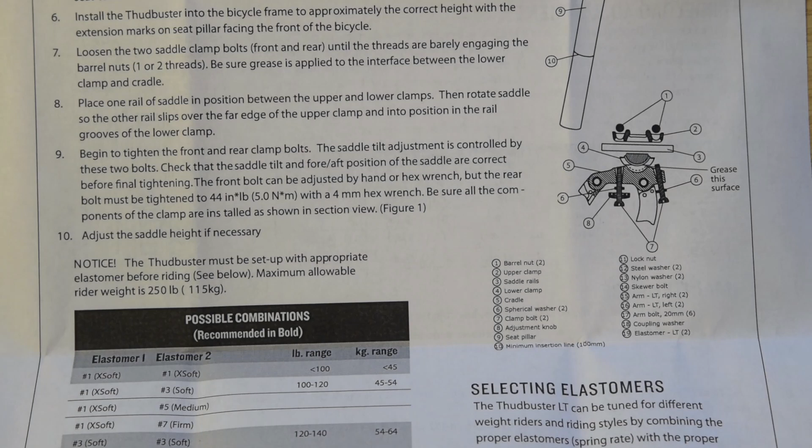It's probably wise to read through the initial installation instructions, so here's what it looks like. If you want to pause and read through it, you can. Here's the lower part, and I'll move it down one more time. The chart here could be pretty important, so let me get a closer look at that.

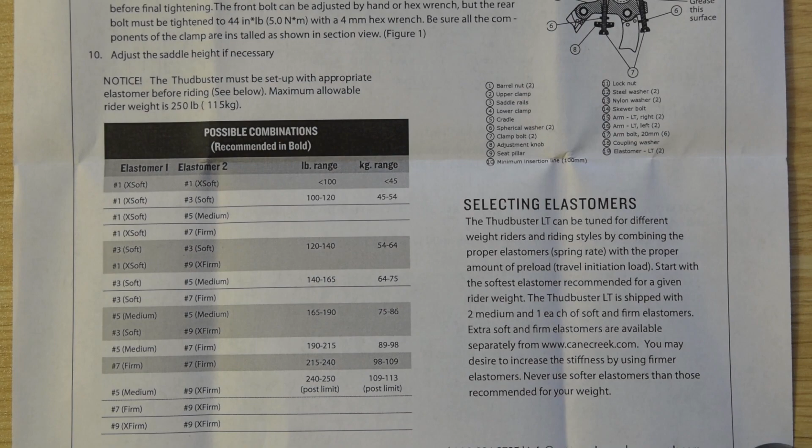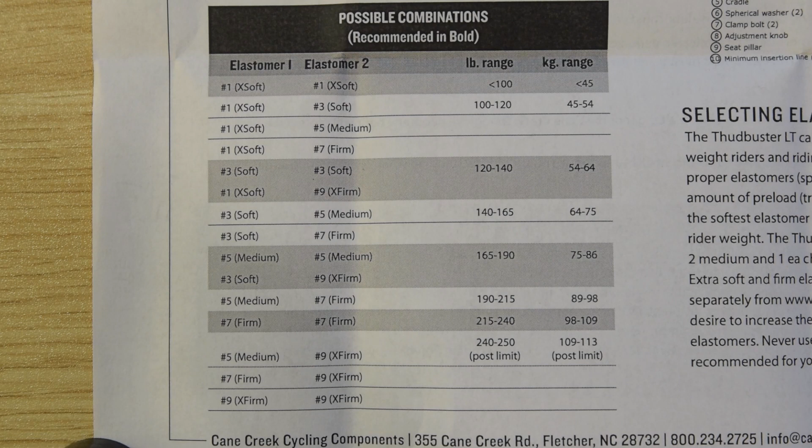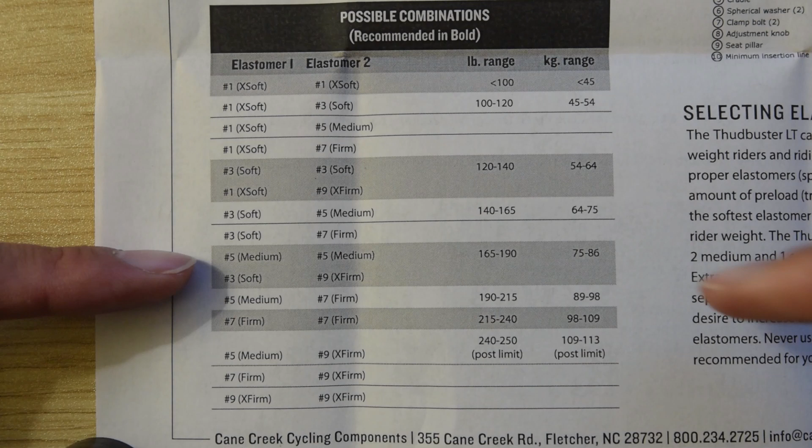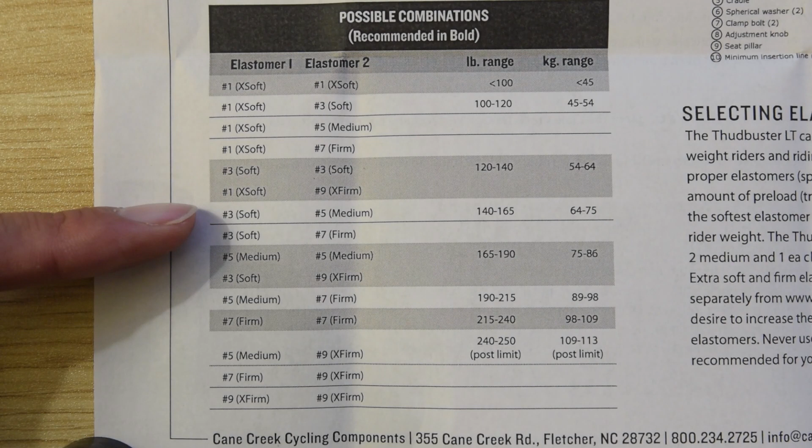So indeed this chart is important, whether you already have one or not. It shows the combinations of elastomers, and what it comes with is two 5s, which is for riders weighing 165 to 190 pounds, or between 75 and 86 kilograms if you're metric. I am a little lighter than that, so I may have to go with a 3 and a 5, because I'm between 140 and 165 pounds, so I'm going to use that.

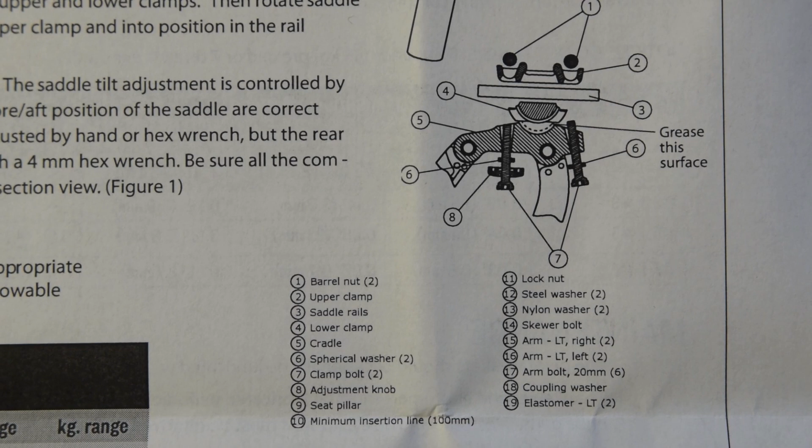There's also another schematic diagram here, so let me get a close-up so you can see how it's put together. As I mentioned earlier, it's supposed to weigh 585 grams.

So what do you think? Does this post weigh more or less than 585 grams? I haven't weighed this yet, but my guess is it'll weigh a little more, because manufacturers sometimes like to say things are lighter than they actually are. So my guess is let's say 590 grams.

Alright, let's see what it is. Oh, hey, it's more than 585. This is weighing at 602 grams as is, and that's with the two number 5 elastomers.

Let me get one more weight in. I'm not sure if these make a difference. Here's the number 7 elastomer — maybe it's more dense than the others. 21 grams. Here's the number 3 — save 2 grams, because this one is less dense than the 7.

So these are the two I weighed: the number 7 at 21 grams and the number 3 at 19 grams. You can't really tell just by looking at it, but if I squeeze it this way, you can see it compacts a little, while with the same force this one barely moves. So it's probably like that when installed — a lot more firm.

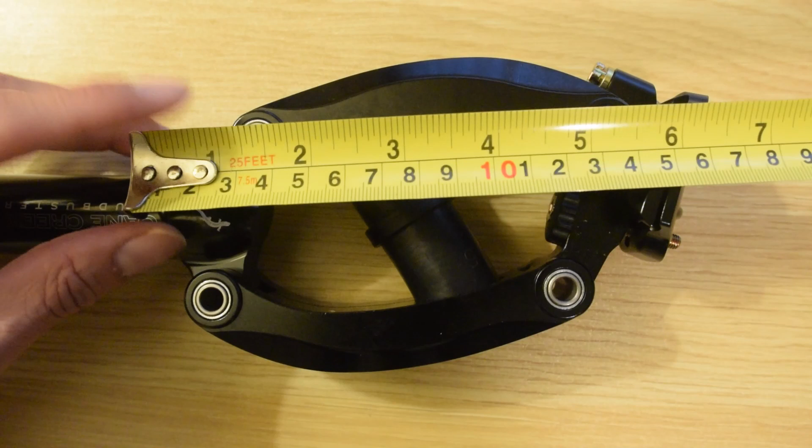You'll see on the left side it's right on the T. I'll hold this there, and when I put it to the middle of the seat post, it looks like it comes closer to 150 millimeters, or 15 centimeters. So make sure you measure — it depends on where in the middle, I guess — but make sure your seat post length has at least, my guess is, 150 millimeters between where the seat post is inserted and the seat rails, or right at the rail. That way you'd know this seat post could work for you.

So this is the back side of the seat post, since the suspension faces downwards toward the rear wheel, and it looks like there's an Allen wrench bolt — looks like a 5 millimeter to me just by eyeing it. Then on top here is another Allen bolt, and this one looks like it could be 4 millimeter, and it says the torque spec is probably 5 Newton meters.

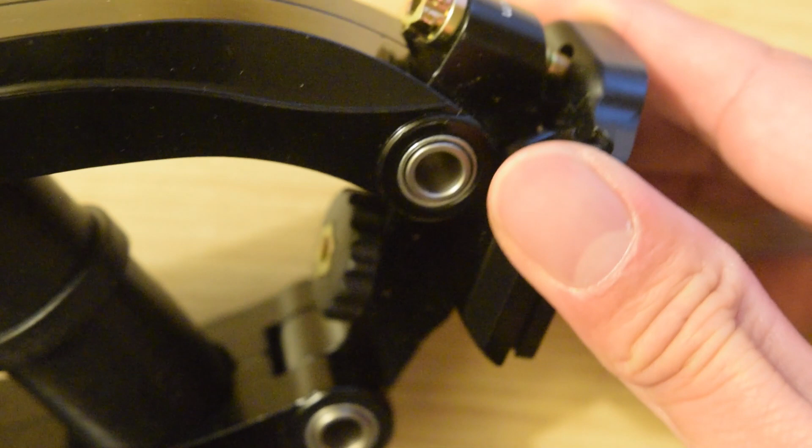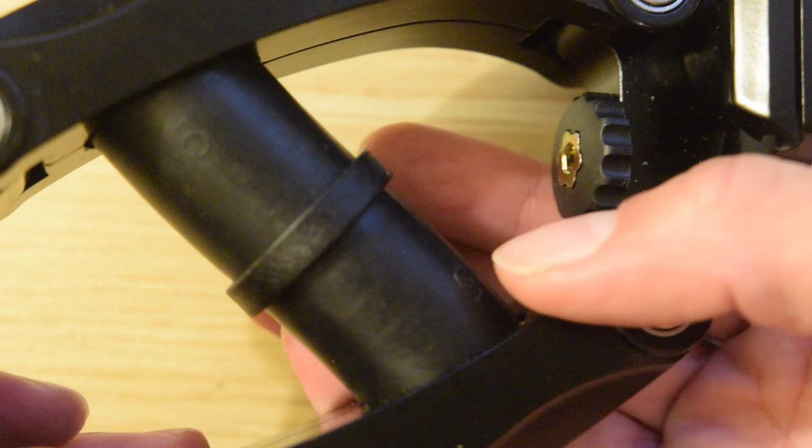And on the inside here is the other part for the seat post, and I don't see a torque spec for that one. This one's actually real tight, so I don't know if I need a wrench. I'm already putting little marks in my hand just trying to move it, so it's real tight. I'm going to have to use a wrench or something to loosen it up a bit, and then we can go look at this side.

This is the upper side, and if I use something flat, even with my hands, you see that it's flush. I could just turn it to show you it's flush. Therefore, you may need a socket to get to this, because if you have a crescent wrench, it'd be a little tough to get in there to loosen that. What other people have said is you'd have to put the seat post in, sit on it a little to compress the elastomers together to loosen it. Then you could go ahead and get towards that.

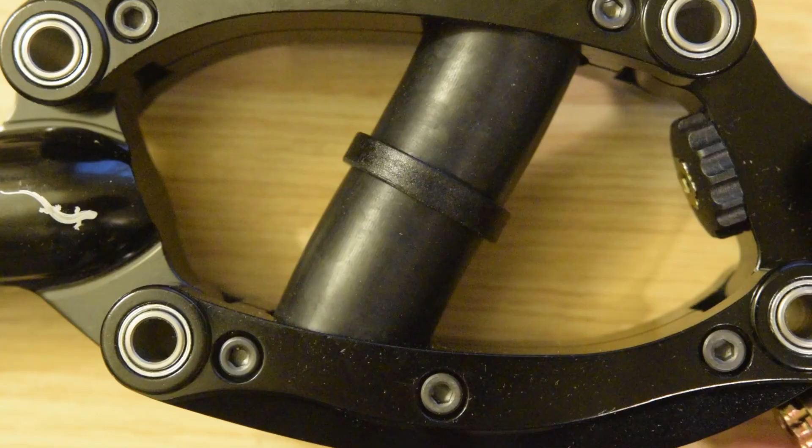So I'm just showing you a close look at this seat post. The front of the seat post is actually upward. This is the front part because the rear faces towards the back. And just looking at the pivots and some Allen bolts. And then I'll go ahead and flip it over, show you the other side, and it looks like those Allen bolts that were here and here on the other side are only on one side, and that would be on the left side. So this is the back because it's lower, and so this is the front, and this would be the left side.

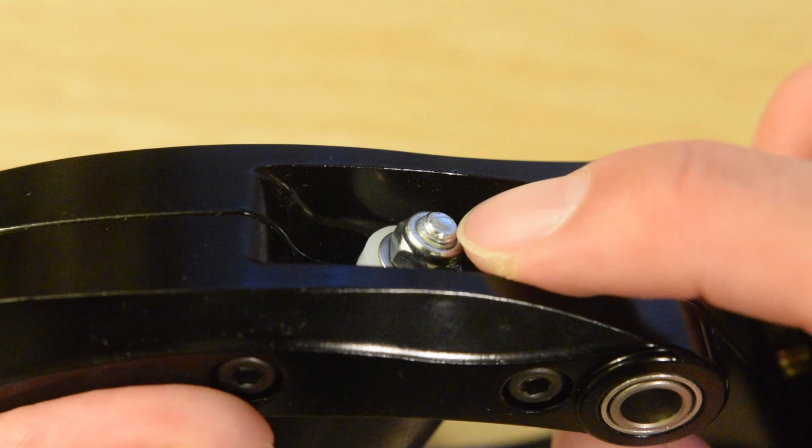Another thing I want to note is this is factory install, and you want to see how many threads there are, so when you do change the shims, or elastomers I mean, you just want to see how many threads there are. So when you tighten it down, it looks like there's about 1.5 to 2 threads showing at the end of this bolt. So that's what you want to note. Then when you install it, and you install it the same, it should be as the factory installed it.

Alright, I tried real hard to loosen this by hand, but it couldn't. So if you look from the top, you'll see that it kind of splits apart a little bit here. And unfortunately, I had to use a tool, so only use it at your own risk, and I already kind of scratched it up a little bit. So what I did is I got these pliers, and I put it here, I gripped them, and then I slowly twisted them in order to loosen it up. And actually, I went this direction to loosen it.

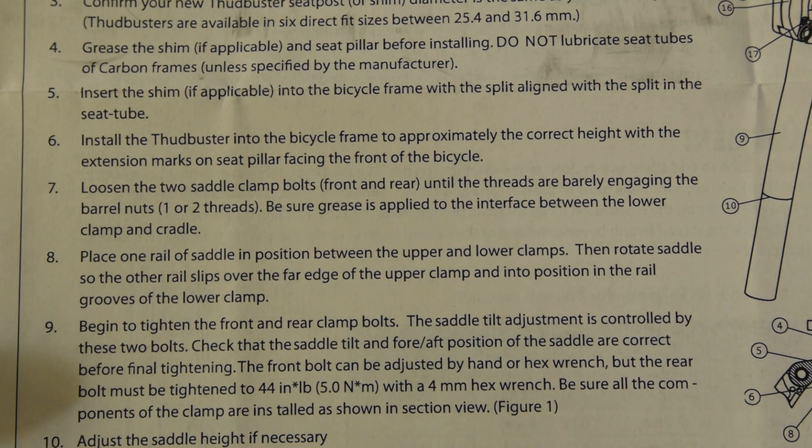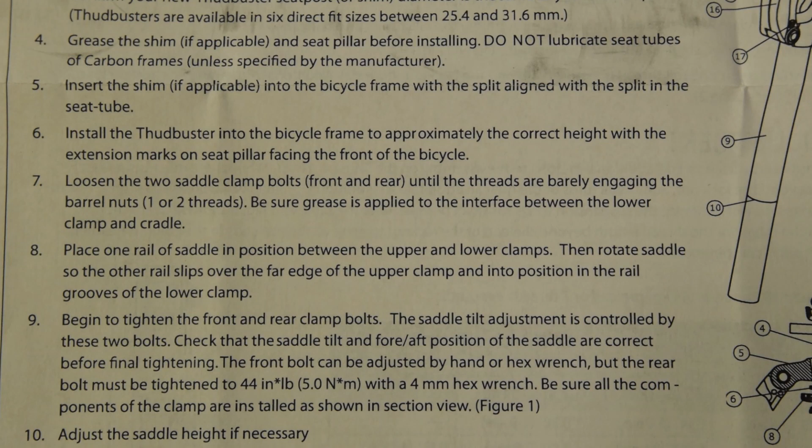The other side, however, it's actually quite loose. You could just loosen it with your hand. So on the install, it says loosen the 2 saddle clamp bolts, which is what I just did. And then be sure grease is applied to the interface between the lower clamp and the cradle. So looking at the seat post, this is the lower clamp right here, and the cradle is right here.

I'll zoom in a little bit there, and if I put my hand here, there's no grease there. So you're going to need to have some grease in order to install this properly. And this part's not coming out by itself, so I may have to take both the bolts completely off to install some grease, and then I could install it back in.

And lastly, there is this label inside with warranty information on the other side.

Well, there you have it, the contents of the Cane Creek LT Thudbuster suspension seat post. This one's 27.2 millimeters.